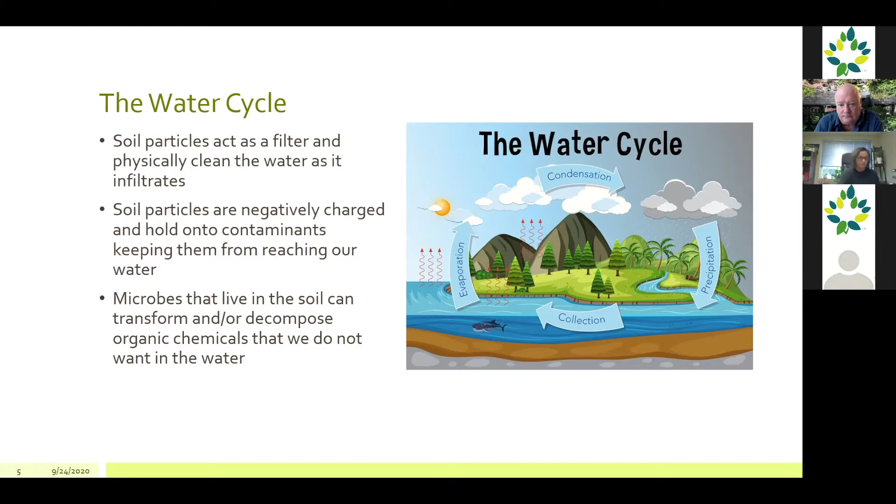The traditional approach to water management was just to drain the stormwater away as quickly as possible into the nearest waterway. But we've learned over time that this isn't a good way to manage it.

Using Toronto as an example, they have had a lot of flooding in recent years, and that's just because of the increasingly frequent rainfall. Rainfall is thought to be linked to global warming and changing climate and weather patterns. Because climate change is unavoidable, we must adapt how we manage everything.

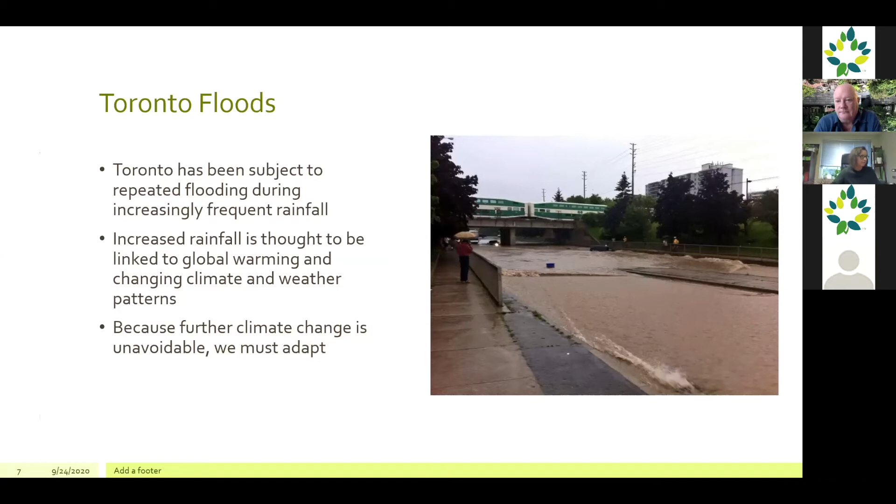Our modern approaches try to mimic natural processes and allow the stormwater to soak into the ground, which will allow it to be released more slowly into our local waters. This doesn't mean, though, that we won't experience flooding, but if we can better manage the water that is falling, we can lessen the damaging impacts.

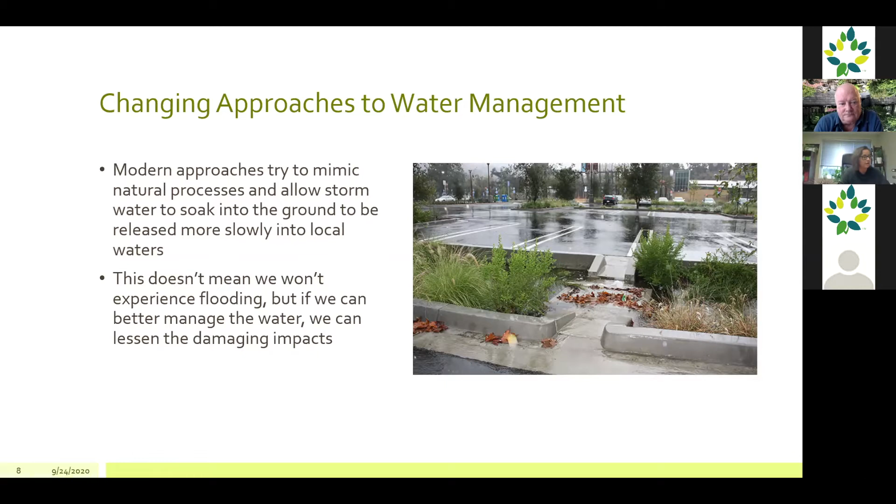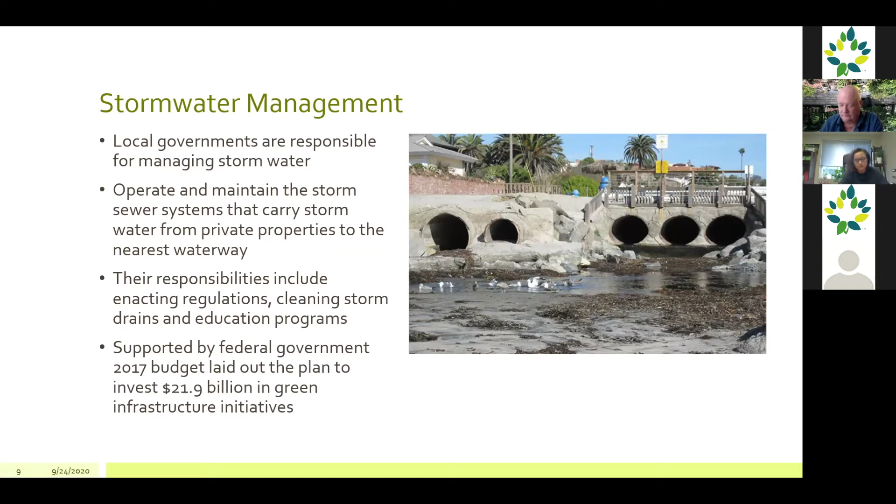Local governments are the ones responsible for managing our stormwater in general. They operate and maintain storm sewer systems that carry the stormwater from private properties to the nearest waterway. Their responsibilities include enacting regulations, cleaning storm drains, and education programs, among many other things. They are supported by the federal government in some ways, which lays out and invests in green infrastructure initiatives on an ongoing basis—depends on who's in power, I guess.

In terms of green infrastructure, essentially it's a network of strategies used to address urban and climate challenges. It uses soil, plants, and trees in swales, rain gardens, green roofs, and other structures built to capture, store, and clean rainwater before returning it to our waterways and atmosphere. It can include reuse of rainwater for toilet flushing and irrigation as well.

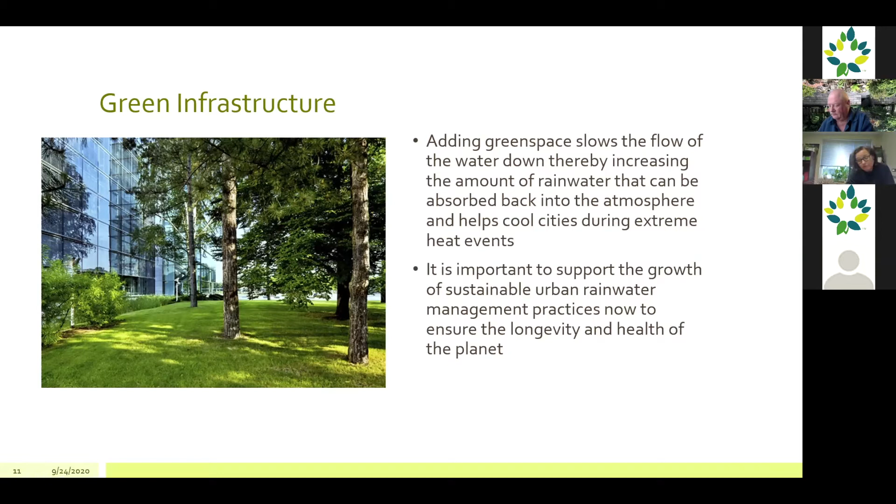By adding green space, it slows the flow of water down, thereby increasing the amount of rainwater that can be absorbed back into the atmosphere, and it helps keep our cities cool during extreme heat events. So it's important to support the growth of sustainable urban rainwater management practices now to ensure the longevity and health of our planet.

The benefits of green infrastructure are many. It can improve air quality, depending on what element of infrastructure it is. It can reduce the heat island effect. They tend to mimic the natural water cycle and generally serve to increase biodiversity. A lot of the green infrastructure we use creates visual interest, and it fulfills our biophilic needs—biophilia being the theory that humans need to interact with the natural environment and nature.

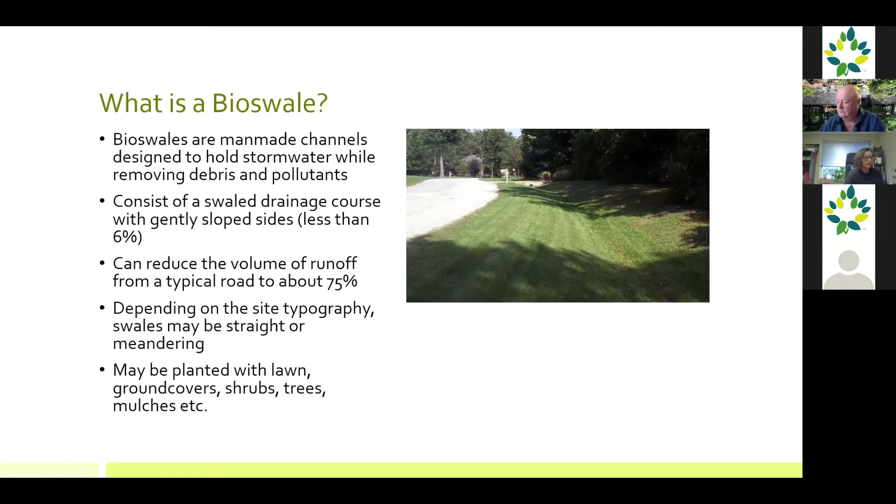So bioswales would be commonly installed along streets and around parking lots. The idea is that it's going to capture the automotive pollution that is settling on the pavement.

Essentially what happens is when we get a heavy rain event, which would be considered the first flush. The first flush is the first rainfall that we would have after a while, and that first flush is what flushes away all of the sediment that's on those surfaces.

It differs from a rain garden in that it has a sloped base to facilitate water movement and is generally larger in scale.

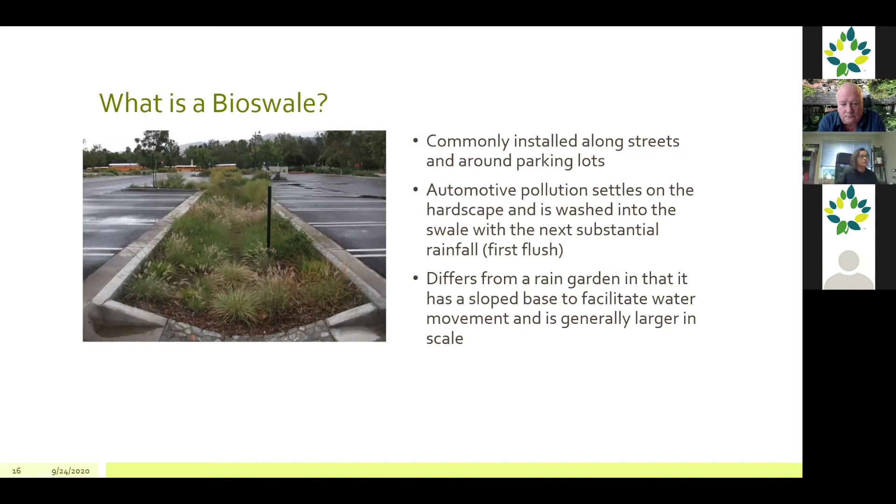So bioswale maintenance includes removing the accumulation of sediments and trash and improper growth of vegetation, which can all affect the quality and performance of the swale. So we need to maintain it annually, and that will of course involve a visual inspection, but it may also include some soil testing, mechanical testing, and all of those things are crucial to the health of the bioswale.

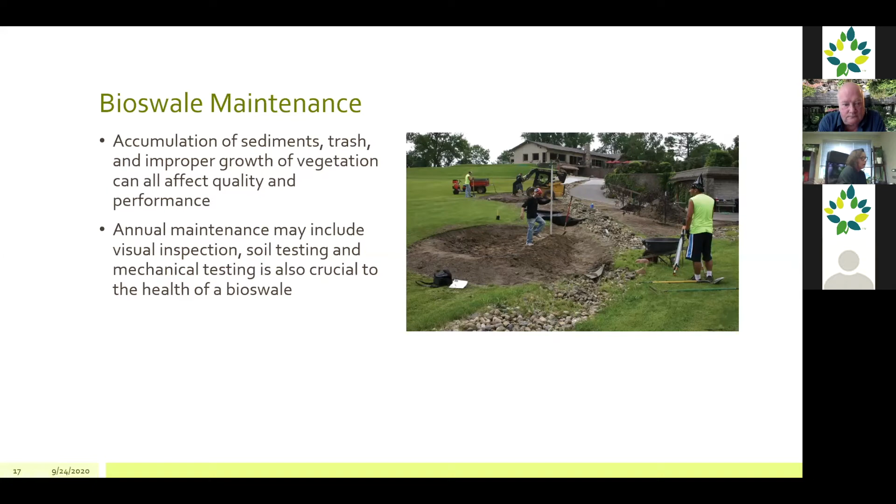There are essentially 3 types or 3 levels of bioswale maintenance. The first one is more aesthetic in nature, and that's just required to remove the weeds that affect the performance of other plants, or maybe the bioswale itself. So cleaning it out, removing the trash, and maintaining the vegetation that's growing within it. That could even just be cutting the grass if it's a grass swale.

Partial restoration is needed when the inlet is blocked by sediments, or when vegetation and mulch, etc., needs to be replaced. A full restoration may be required when the bioswale is no longer filtering out pollutants adequately and overall performance is severely lacking. You can generally avoid full restoration, or at least extend the life of the swale, if you keep up with regular maintenance. So that is the key.

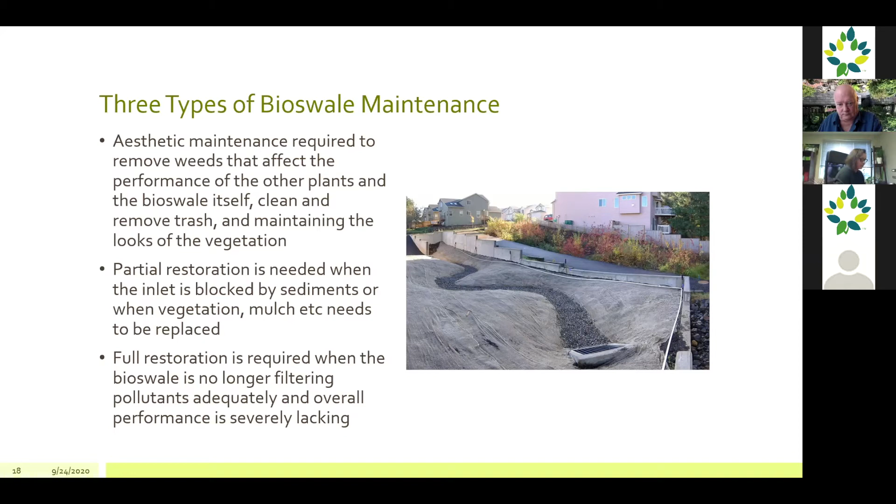So here is a bioswale that we have in Olympic Village in Vancouver. Water is diverted into the swale from the adjacent roadway.

And you can see that some maintenance is required. This is the base of the swale, and you can see that the rocks that are designed to collect and trap all of the debris are getting covered. So at some point, maintenance is going to be needed.

Moving on to rain gardens. So a rain garden is a garden of shrubs, perennials, and flowers, planted in a small depression. It is designed to temporarily hold and soak in rainwater runoff that flows from roofs, driveways, patios, or lawns.

They are generally constructed on the downside of a naturally existing slope, and they allow about 30% more water to be filtered versus, say, just a lawn outside of your home. Infiltration may take up to 48 hours after a major rainfall. There is a heavy focus on native plants usually in a rain garden, although it doesn't necessarily have to be the case.

So the benefits of the rain garden are that it improves water quality by filtering out pollutants. That's a common theme with our green infrastructure here, filtering and cleaning the water. It provides localized stormwater flood control. It's aesthetically pleasing. It attracts beneficial birds and insects. It's easy to maintain after establishment. And it can preserve native vegetation if you implement that.

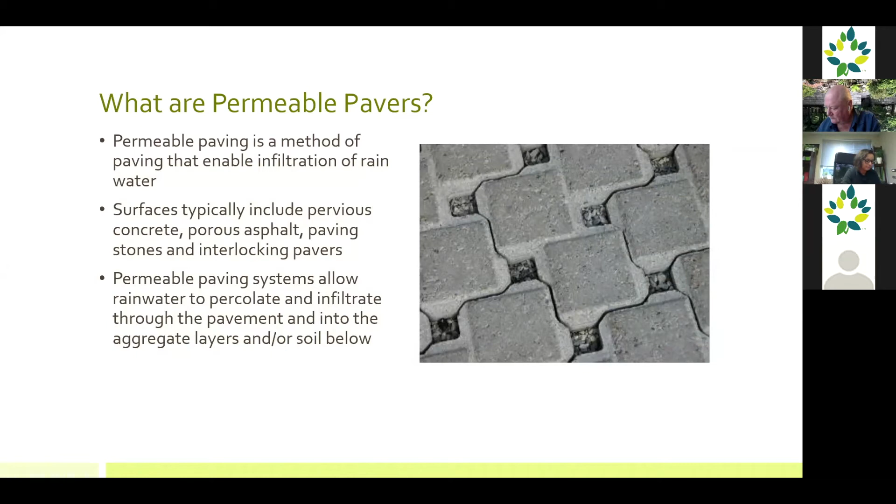So there's different terminology in the industry for these permeable pavers.

Permeable and pervious imply that the water can pass freely through the material. But porous means that the water can get in, but not necessarily through.

Although all three of the terms are used interchangeably in the industry, porous is kind of perhaps not the correct word to use.

And here's an anatomy of what permeable pavers are going to look like. So you've got your surface cover on top, which would be whatever type of permeable pavers you're using for your application.

Then you're going to have a support system underneath, so your base, which would be something that would be compacted, because obviously it's got to support a certain amount of weight. Depending on what the application is, it's going to be a thicker base.

And more heavily compacted if it's supporting more weight, like the weight of vehicles - it has to be quite strong in order to support that weight. But if it's just a patio for a residential application, it wouldn't have to be quite such a thick base.

And then you will have your sub base, which is just your existing soil underneath. And in many of these applications, you may have an underdrain underneath your surface, but that tends to be mostly...

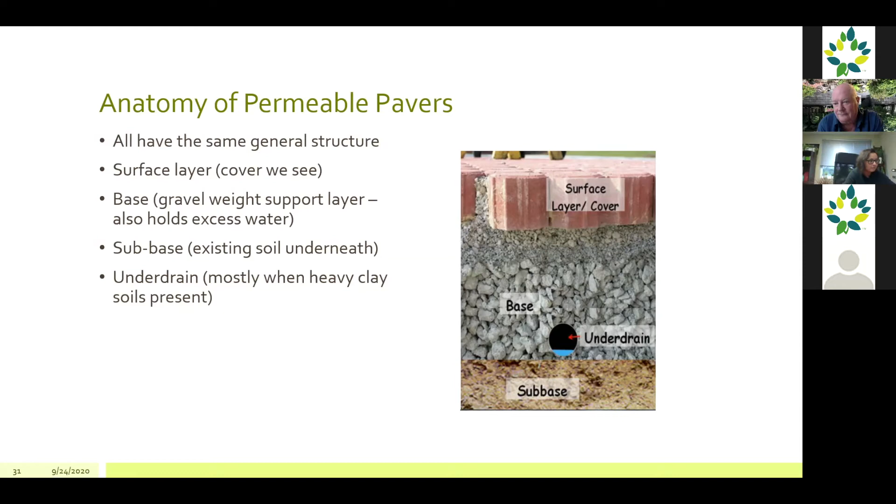when there's heavy clay soil present, because as we probably know, heavy clay soils are problematic. They are very slow to uptake water and then also very slow to release it. So they don't make the best for rainwater management.

So the benefits of permeable pavers include the fact that it eliminates runoff. It also recharges the groundwater below, and it traps suspended solids and pollutants, as does all of this green infrastructure.

It reduces surface temperatures, and therefore it also reduces the heat island effect, which I'll talk about in a bit. It eliminates the need for retention basins and water collection areas.

So if you have permeable pavers, the water doesn't need to be diverted to a storm sewer or anything, because it's actually just going right down into the ground below the permeable pavement.

And as such, it eliminates capital costs for these retention basins, curbs, gutters, and all of these other water collection installations that you would otherwise need.

Generally, they require less salt and other de-icing products, which is a nice benefit.

And of course, the installation costs are lower because you don't have as much underground piping, storm drains, or sloping or grading needed. The life expectancy is the same as concrete as well, which is pretty darn good.

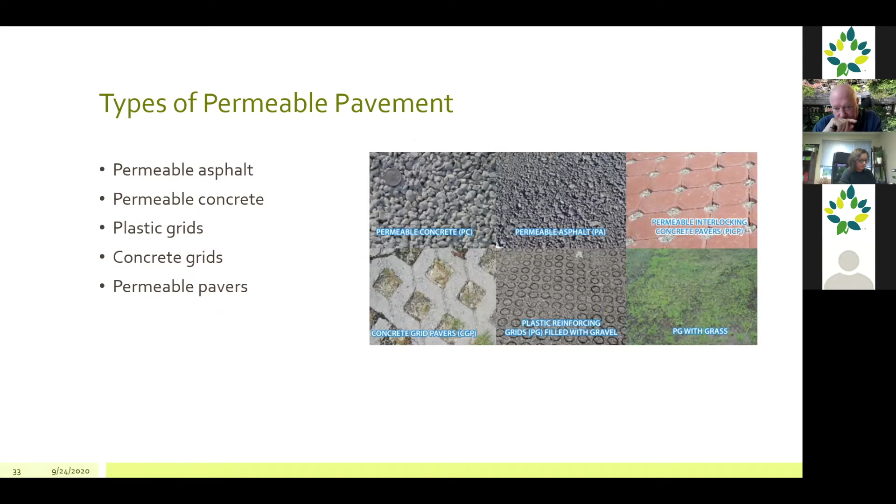So in terms of the types of permeable pavers, there are several different ones. So we've got permeable asphalt and permeable concrete. We've also got plastic grids, which may be filled with grass or gravel. And then of course we have what we would call permeable pavers. So we'll go through them one by one here.

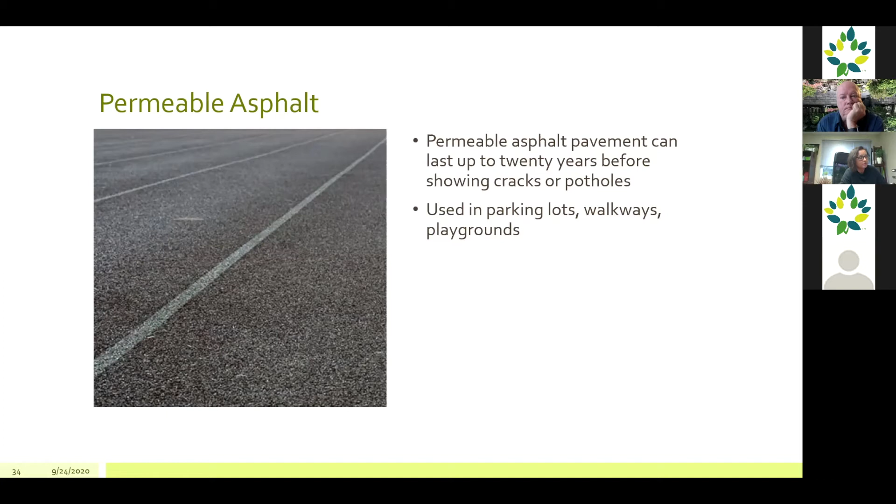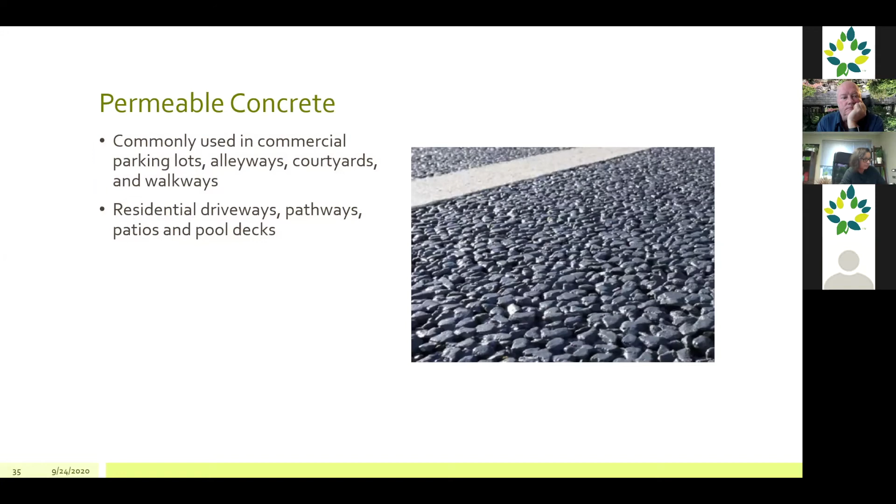Permeable asphalt is pavement, and it can last up to 20 years before showing cracks or potholes, and it's typically used in parking lots, walkways, or playgrounds. Permeable concrete is commonly used in commercial parking lots, alleyways, courtyards, and walkways, and it might also be used in residential driveways, pathways, patios, and pool decks. You can see the surface structure is a little bit different.

You can also have plastic grids that may have stone, and these can be used as well in public spaces and parks, driveways, access roads, parking lots, especially like an overflow type of parking lot. Or it could be suitable for, say, like a parking lot at Van Dusen or something. Camping sites are suitable applications, even playgrounds, bicycle trails, pathways, sports grounds, golf cart paths, and then there's also various landscaping and patio applications.

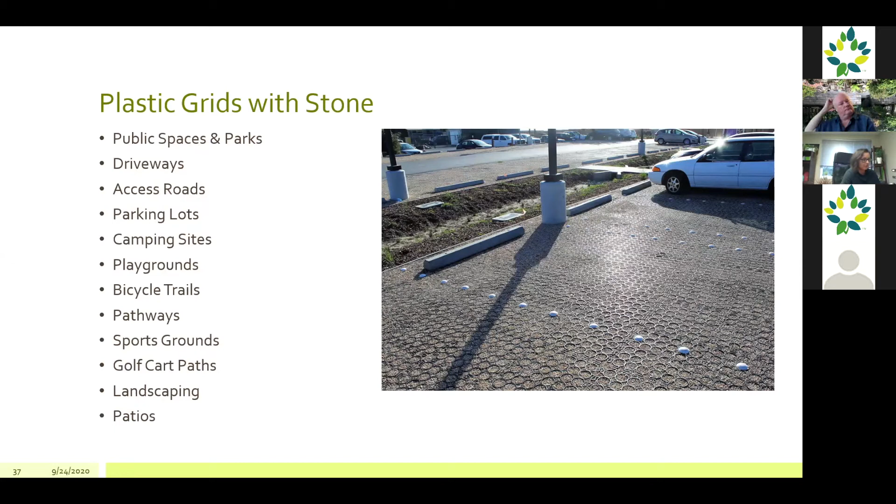There are also concrete pavers that may have grass, or they may not have grass. They could also have gravel. You've probably seen these over the years in emergency and fire lane access areas. These can also be used in some overflow parking lots. Again, golf cart paths, drainage channels. It can also be used for slope stabilization and erosion control, or perhaps even some street shoulder parking.

And then we come to permeable pavers. So this is what we tend to install here in our business. So this is typically used in a patio or terrace. It may be also used in a garden or a pool deck, driveway or walkway, maybe some parking stalls, like a parking lot or on the shoulder of the road. And there might be some municipal applications as well in various parks and whatnot.

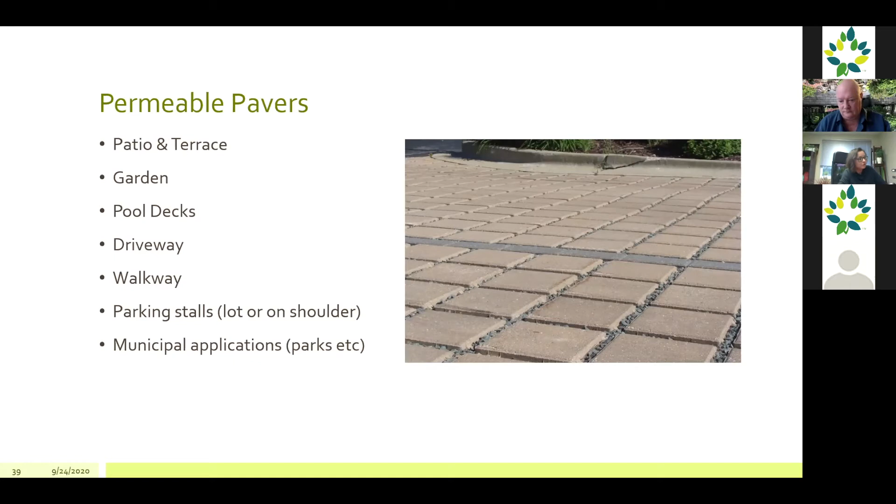So permeable pavement is generally not for highways and not always for streets. At this time, permeable pavement isn't really designed to handle, I guess it's probably more the speed of the vehicles that are traveling across it. So I'm going to show you an application where it is used here in Vancouver in a major roadway, but it is also a traffic calmed area where the maximum speed is 30 kilometers.

We definitely would not want to be using permeable pavement at a potential spill site. So something like a gas station, it wouldn't be suitable because gas is getting spilled every day at a gas station essentially. And anything where really, really heavy loading is happening as well.

So maintenance of permeable pavers: they will become clogged over time, and that can contribute to flooding. So they may require a complete replacement of the permeable pavement, which could be expensive if you're not maintaining it. So what is recommended is that you remove the debris monthly, or weekly if you're doing regular maintenance on a maintenance contract. But definitely monthly, you want to be removing any litter, grass clippings that are flying onto the pavement, also leaves, crackweeds, sediment, etc.

So permeable pavement maintenance and care is different for each different type of application. But essentially what you want to do is inspect your paved area after storm events to ensure that it is actually draining. So if you're seeing water pooling more than 36 hours after an event, that is a sign that it's not functioning anymore and you need to do some investigation.

In terms of snow removal, you want to make sure that you use a rubber-tipped snow shovel to prevent damage and chipping of the application. And if you're using snow plows, typically you want to be setting them a 1/2 inch to 1 inch above the height of the permeable pavement to prevent any damage and chipping. But always follow the manufacturer's instructions for the specific type of pavement that you have.

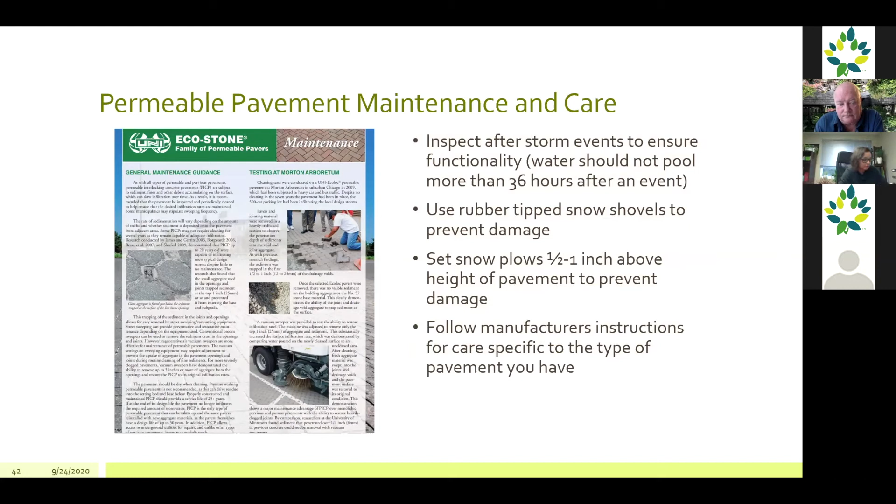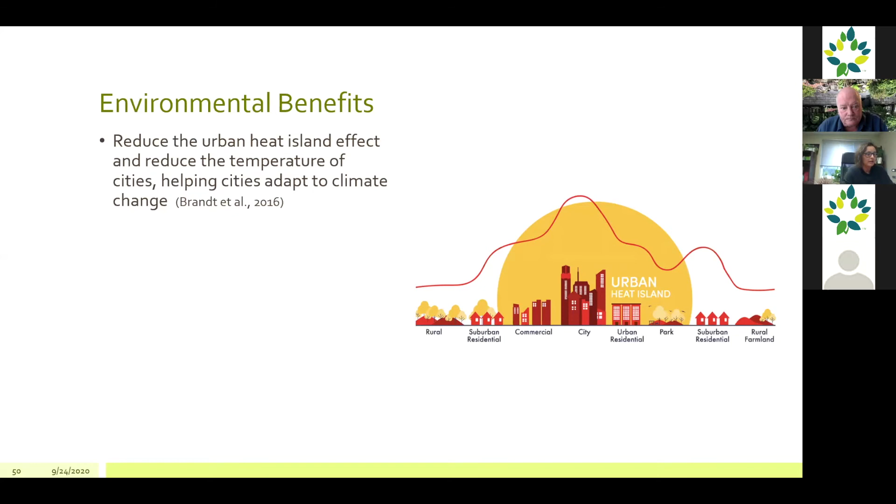So it tends to get hotter because not only do we have the sun that's beating down, we have the heat that's reflecting off of these surfaces. So if you can think of when you're walking around in your bare feet and what it's like to walk on hot pavement versus walking on a lawn and it doesn't burn your feet. So that's kind of a way of thinking about the heat island and the difference between the different types of surfaces.

Other benefits include reduction of the building's energy use. So by shading buildings, they require less air conditioning in the summer. And then also less heating costs in the winter, because in the wintertime they actually allow the sun to penetrate and warm the houses.

And moving on to social benefits, because there are so many benefits of trees. Urban forests make cities more beautiful and can hide unattractive features like walls, freeways, and parking lots. I know I like to install them to create privacy between units in apartment towers or even in homes. Urban forests promote mental well-being and reduce stress, heart rate, and blood pressure, which is probably linked to that theory of biophilia we were mentioning earlier.

And then there's also many other social benefits. So it can reduce crime rates and violence. They promote physical activity by providing space for recreation and creating an appealing outdoor environment. Urban forests can promote healing. So people in hospital rooms with views of trees actually heal faster. There's some interesting studies on that.

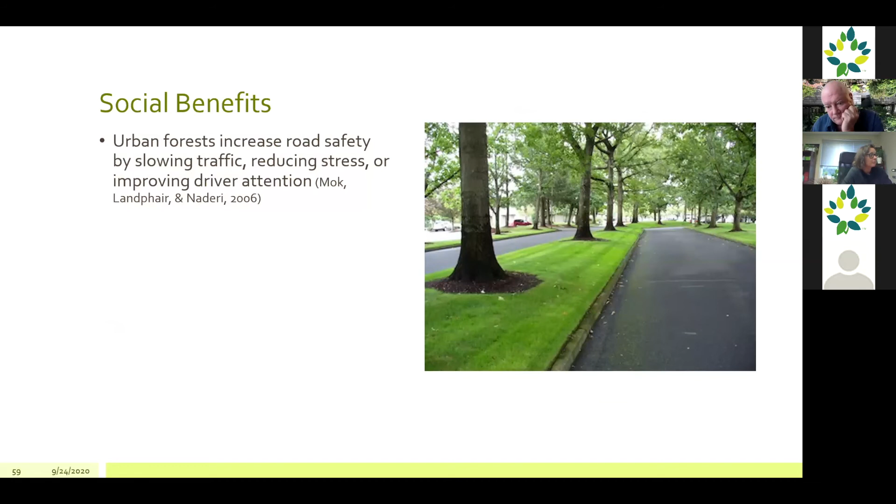And then moving on to the economic benefits they provide. So urban forests provide ecosystem services valued at $330 million per year for Halifax, Montreal, Vancouver, and Toronto. Urban forests add value of between $1.88 and $12.70 for every dollar spent on maintaining them. So you're getting a good return on investment by investing in an urban forest.

And urban forests increase property values. Generally having nice landscaping can increase your property value up to 15%, and urban forests are definitely part of that. And they have a positive influence on visitors' perceptions of a city. So I know personally that when I go to other cities and I don't see a lot of trees or greenery around, it's something that really jumps out at me, and I really appreciate the amount of green space and urban forests that we have here in Vancouver.

So Vancouver has implemented an urban forest strategy. In 2014, Vancouver City Council approved this strategy with the goal of protecting the urban forest during development, planting trees to grow and increase the size of our urban forest, managing our trees for health and safety, engaging citizens in the urban forest, and monitoring the status and condition of the urban forest.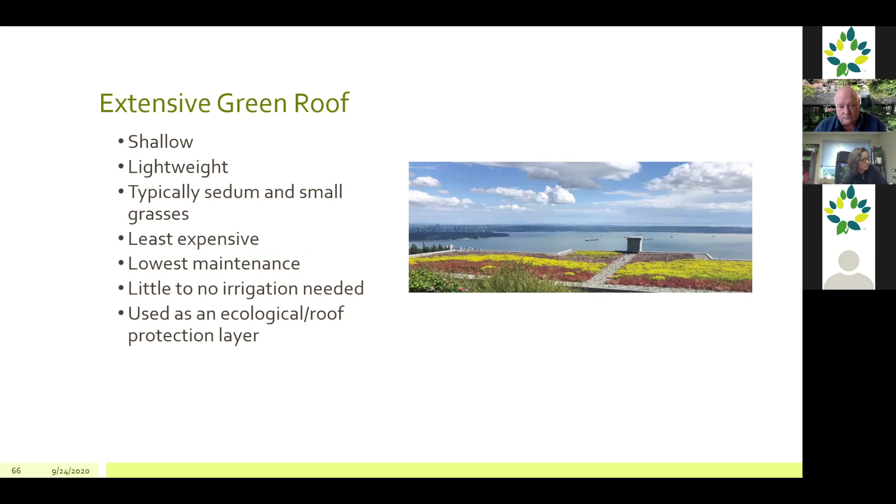Then we also have semi-intensive green roofs. Those have a moderate soil depth, usually between 6 and 12 inches. And because there's more soil and more plant material, there's going to be more weight. Typically, grasses and shrubs will be growing there, and it's more expensive than an extensive roof because it's more materials. The maintenance is a little bit higher.

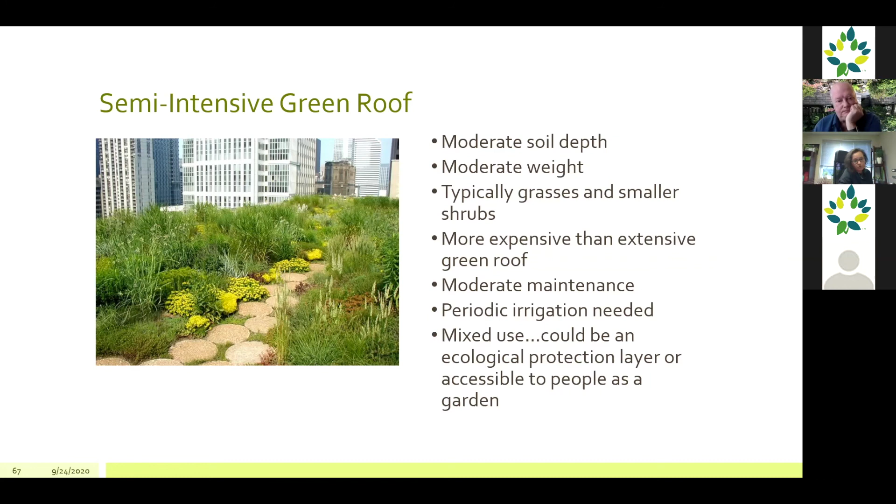It does need a bit more irrigation, and it might have mixed use. So it's an ecological protection layer, so it's functional for that, but it's also maybe open to people for a garden. And then we have an intensive green roof.

So it's got the greatest soil depth. It's the heaviest. It may have lawns, perennials, shrubs, and trees. It is the most expensive to install because it's got a lot more engineering and materials involved. And it also requires the highest level of maintenance. It does require regular irrigation, and it would typically be an accessible park-like garden space.

So this is one of our properties that we maintain near Cambie and Broadway here in Vancouver, and it's called The Rise. And you can see it's a rental project, but it's got a community garden. It's got a nice grass space where all of the residents play bocce and whatnot. Yeah, it's a really nice area.

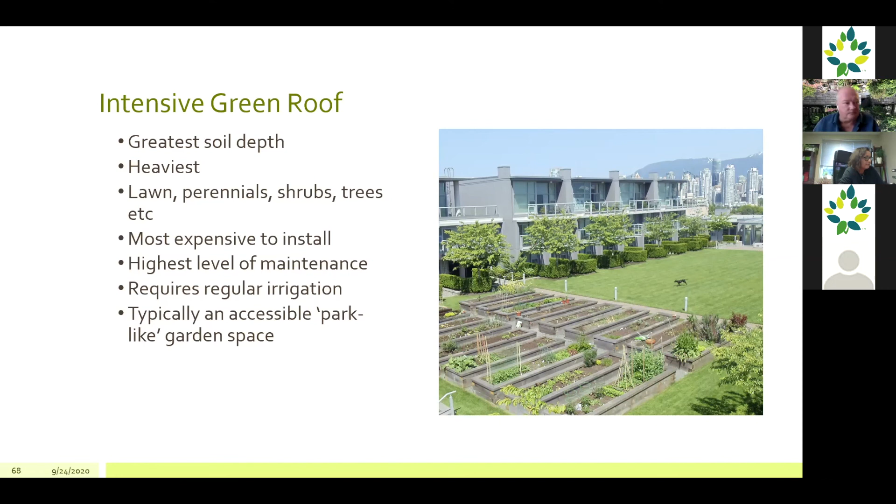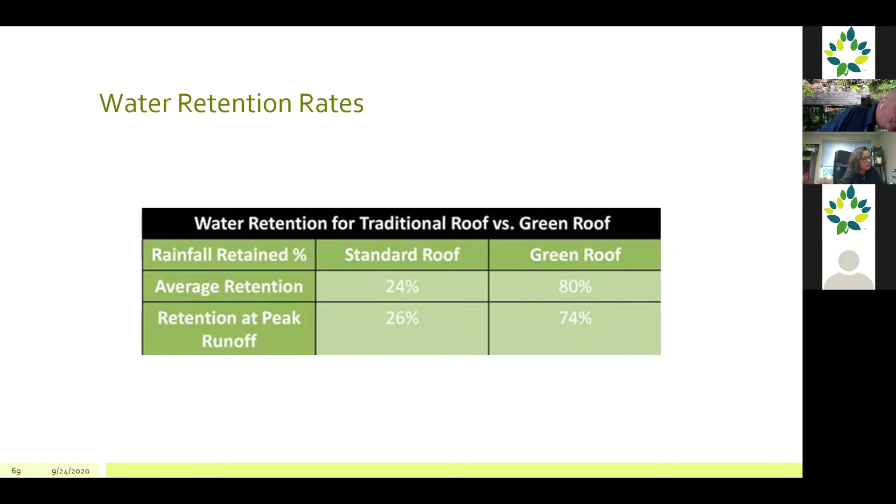So in terms of water retention, green roofs outperform a standard roof quite significantly. They retain 80% of the water that falls on them, and at peak runoff up to 74%. So other benefits specific to green roofs, they extend the life of the roof. It's a misconception that trees and plant material damage green roofs, or damage the membrane, but that's not true.

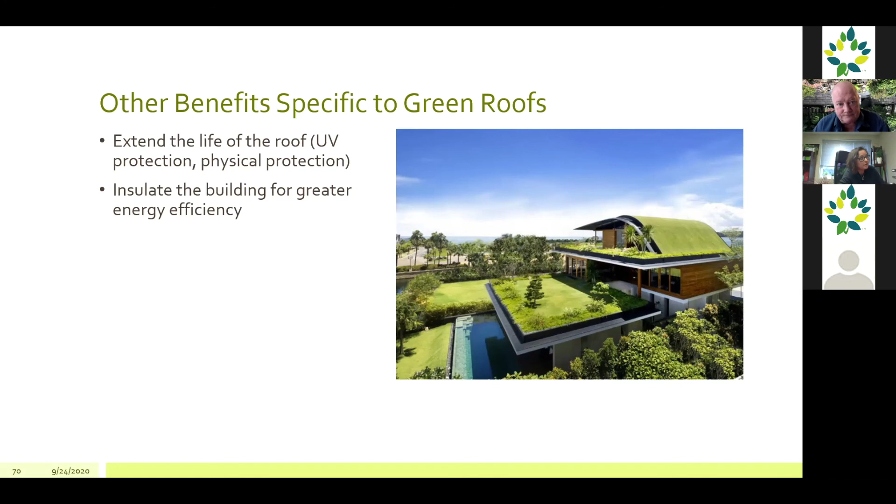What damages the membrane is really either the membrane fails through age, or it fails because it wasn't installed properly. And unfortunately, not being installed properly is probably the #1 reason. Contractors cut corners, and they know all of their work is going to get covered up by all of this material. No one will ever know. But then a tree or something will find a hole and seek it out and make it worse. But essentially they insulate the building for greater energy efficiency.

So looking ahead, we in the landscape industry have added the installation and maintenance of green roofs and walls, and also stormwater and rainwater management systems to our Red Seal occupational standard. So apprentices will be learning these elements through their schooling and training going forward. And our industry sees itself as a community partner to help mitigate the effects of climate change.

So Vancouver, just to touch on this quickly, has most recently developed a Rain City strategy, and it has 3 goals: to improve and protect Vancouver's water quality, increase Vancouver's resilience through sustainable water management, and enhance Vancouver's livability. So the goal is for us to capture and clean a minimum of 90% of Vancouver's average annual rainfall, which is quite a lofty target, but it's a good one.

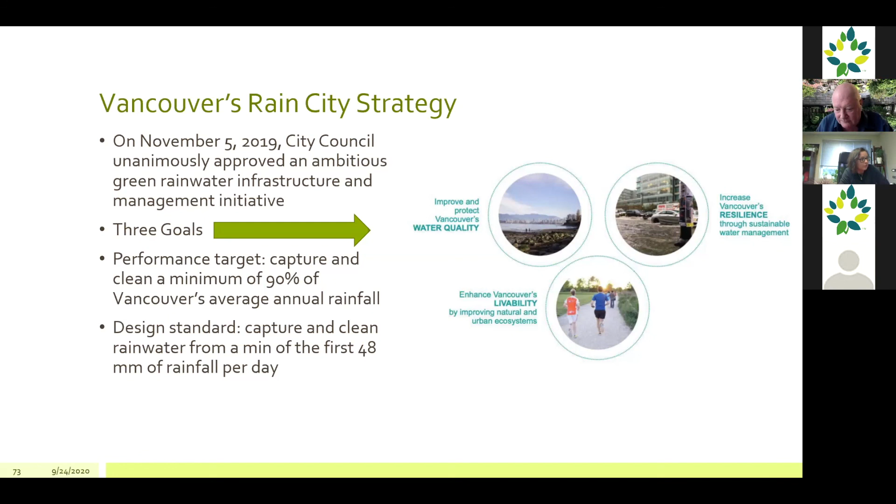And the design standard is to capture and clean rainwater from a minimum of the first 48 millimeters of rainfall per day. They will be doing this by increasing the permeable surfaces in exchange for impermeable ones, increasing the total green space, reducing the volume of rainwater that is entering the sewer system, harvesting and reusing water, and of course, utilizing all of these wonderful green infrastructure elements that we've just discussed.

So that brings me to the end of the presentation.

I will turn off screen share.

There we go. Over to you, Bill. Hey Jennifer, that was great, a lot of really good information. Thank you so much. My pleasure.